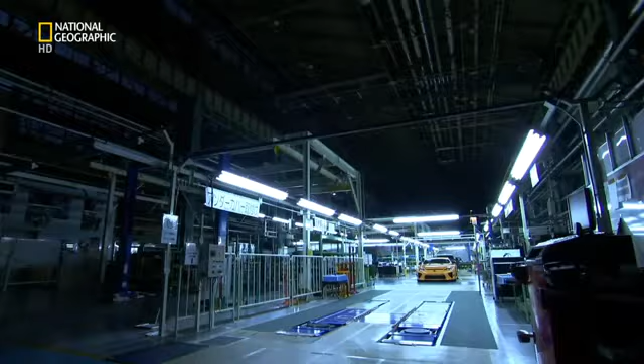Inside this top-secret mega-factory, a car like no other is taking shape. Craftsmen hand-build what they consider an automotive work of art. Money is no object. This machine must redefine a billion-dollar brand. Failure is not an option.

Japanese marque Lexus sells itself on luxury, marketing its cars as elegant, quiet, high-tech, and efficient. Now, a different kind of car wears the Lexus badge, the LFA. Aggressive, loud, agile. Highest revving V10 engine in a production car. 325 kilometers per hour. A car like nothing Lexus has ever produced before.

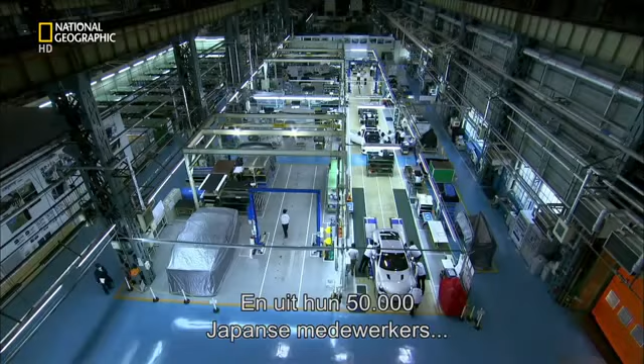The company transformed two unassuming blocks of this megafactory to create the LFA. They then scoured Toyota's 50,000 Japanese workforce to handpick just 175.

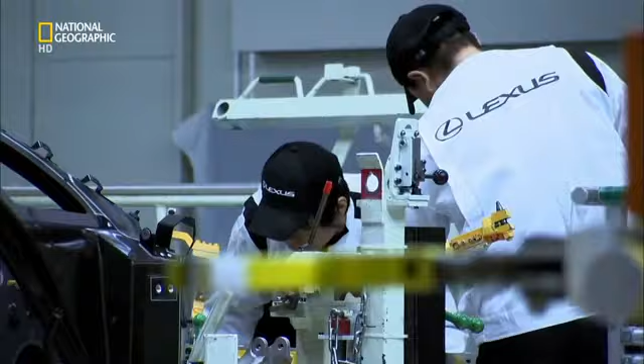All the associates here at the LFA Works feel they are artisans, not just operators. These artisans are known as takumi, Japanese for craftsmen, a status only conferred on the most highly trained, skilled workers. Each and every associate at the LFA Works is seeking to achieve perfection, taking this challenge on with a sort of samurai spirit.

Yamanaka Shigeru is manager of the LFA Works. His teamwork credentials come from another time-honored Japanese tradition: baseball. Before this, I was working as manager of the Toyota Motor Corporation baseball team, which brought people together from lots of different backgrounds. It was because I could manage that organization that I was made manager here.

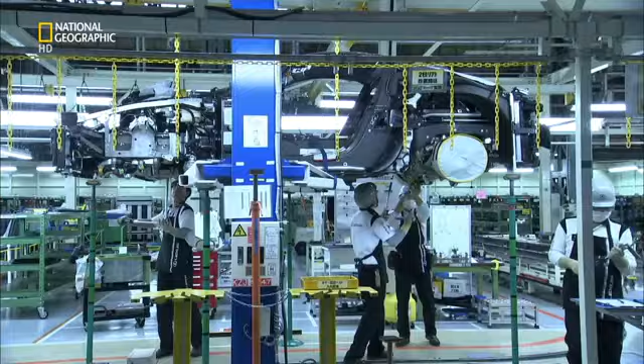To reach their goal, the tight-knit team utilize sophisticated tools and materials to build the car. The most important of these is carbon fiber composite. Carbon is crucial to the car's performance. It's a material five times the strength of steel, yet a quarter the weight. It's the construction material of choice for both Formula One racing cars and the aerospace industry.

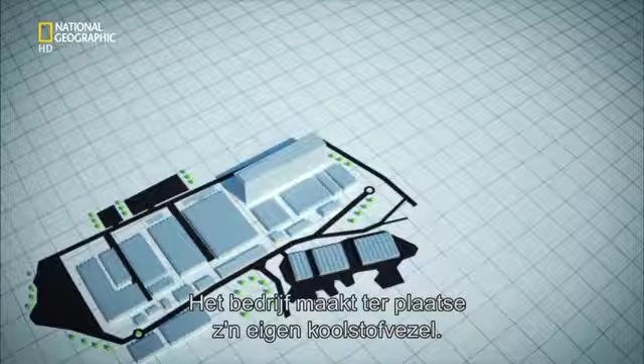The company even make their own carbon fiber here on site. Up until now, no television cameras have ever been allowed inside this top-secret facility. First, simple strands of carbon fiber are woven into a pliable cloth using an automated weaving machine.

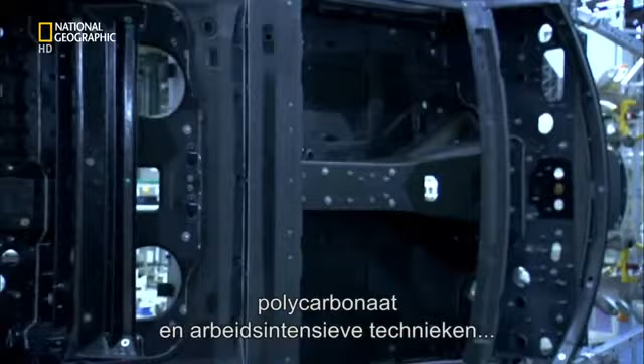This fabric is then transformed through heat, pressure, polycarbonate resin, and labor-intensive techniques into the car's core, known as the tub. The tub is pieced together like a 3D jigsaw. It starts with the construction of the floor. To make it, precisely cut carbon fiber cloth is lifted onto a mold.

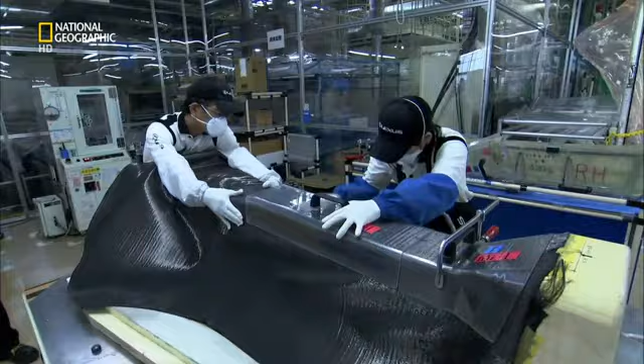Next, skilled takumi smooth the supple fabric over the mold. This one is for the transmission tunnel that will house the drive shaft and exhaust. In very complex areas like this, the fabric inevitably becomes frayed and not very neat. The associates work with these areas as if working with silk, taking great care every day. They also wear masks to avoid breathing in the hazardous fibers.

In the beginning, the associates found it very difficult to work this material. It was much easier when they used an iron.

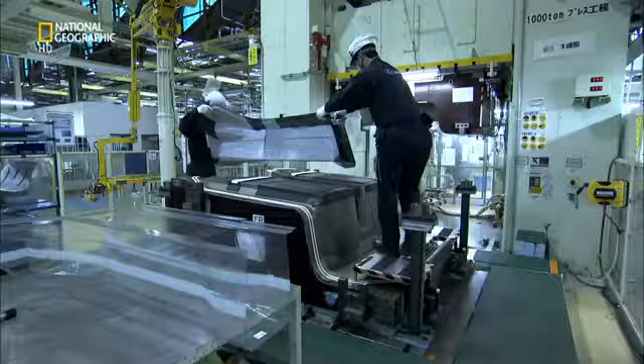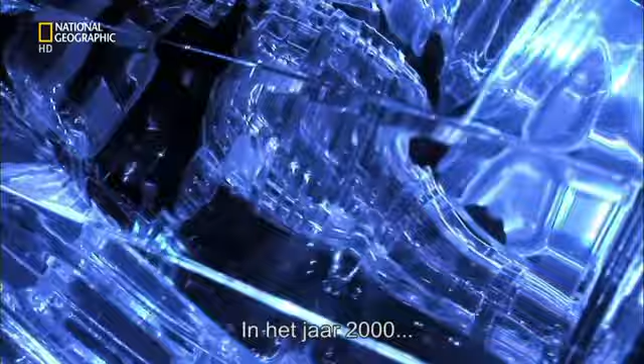Back in 2000, the concept of a world-beating supercar only exists in one man's head. At the company, I talked to just a small group of people at the top, not expecting anything, and they said, go ahead and try.

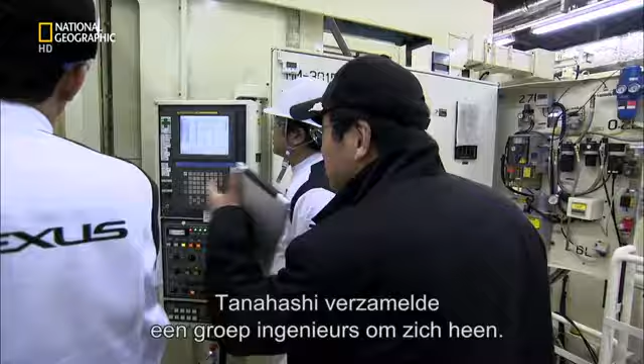With permission to proceed, Tanahashi gathers a team of engineers around him, and they start to make the basic engineering decisions. In the beginning, we planned to make the body from aluminium.

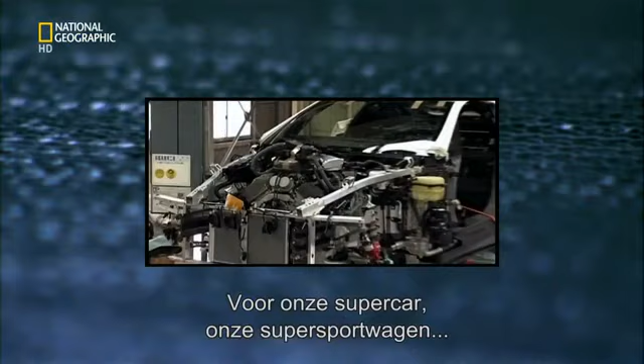But Tanahashi is fascinated with the possibilities offered by carbon. Developing a supercar, a super sports car, carbon fiber was a material I really wanted to try using, if at all possible.

But this wonder material has its drawbacks. It's expensive, and the company has never used it to build any of their cars before.

Despite these significant challenges, Tanahashi gets his way. In 2005, my boss said, why not go for carbon, slapping me on the shoulder. And I made the decision to go for carbon then.

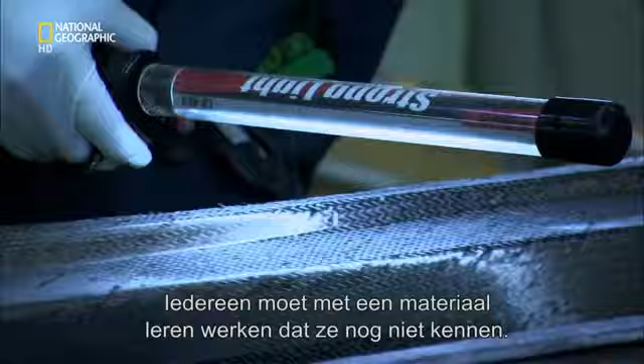It's a bold step. Everyone involved with this project must master a material they have no experience with at all. It was the first time the workers had touched carbon, and everything about it was difficult for the workers.

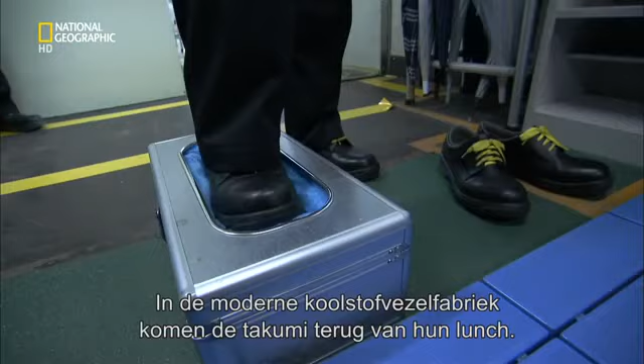In the state-of-the-art carbon fibre facility, the Takumi are returning from lunch. They vacuum themselves down to remove any foreign particles before entering a highly confidential sealed room.

Here, the majority of the tub's central frame is created using the most intricate techniques. In this process, an automated laser cuts out hundreds of individual shapes from carbon fibre cloth that's been pre-impregnated with a sticky resin.

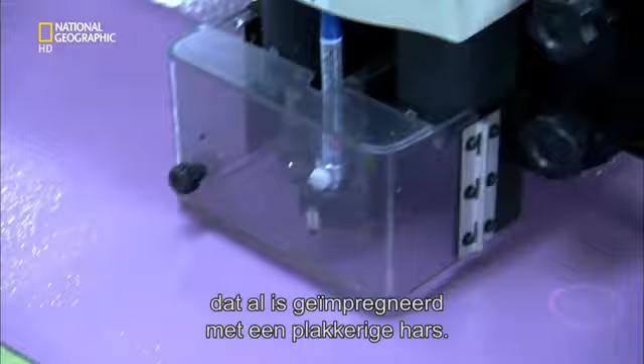Next, Takumi layer the cutouts, up to 20 sheets deep, onto a mould. This one will make the right side panel. The associate uses a dryer to raise the temperature of the laminate and half melts the resin as he applies it.

The tacky cutouts stick to each other and any gaps are squeezed out using a vacuum bag that forces them together.

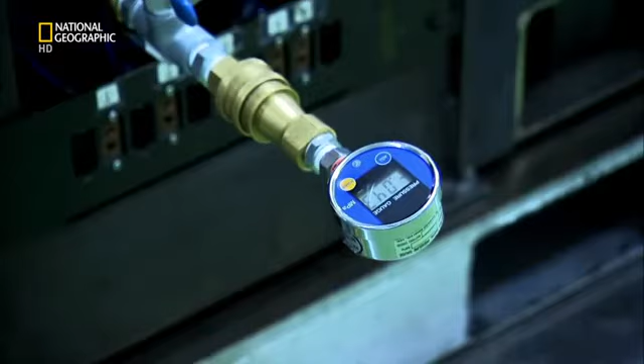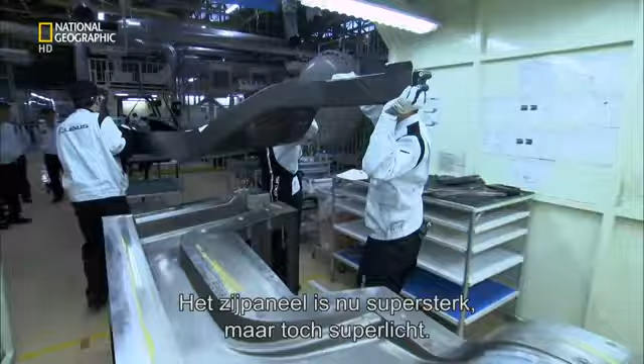The shrink-wrapped side panel is then wheeled across the works and loaded into a pressurized oven. Baking overnight at 150 degrees Celsius sets the resin, resulting in a side panel that's both ultra-strong and ultra-light. An aluminium equivalent would be twice as heavy.

Weight saving is the holy grail for all auto engineers. Less weight and more power leads to increased acceleration, and speed defines a supercar.

The body of the LFA is 65% carbon fibre, helping it accelerate from 0 to 100 kilometers per hour in 3.7 seconds. If made of aluminium, it will be 100 kilograms heavier, like having a sumo wrestler in the passenger seat. As it is, this car weighs just 1,400 kilograms all in.

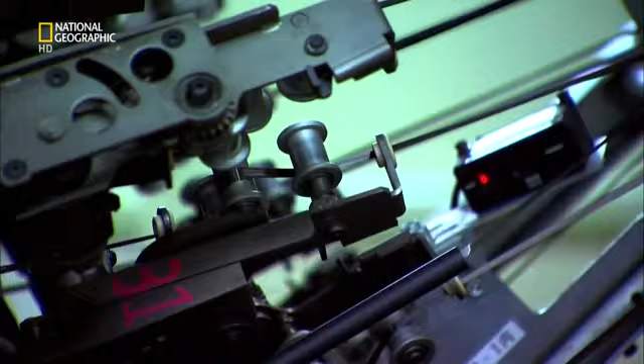Back at the factory, in a locked room, a bespoke machine creates two crucial parts to complete the tub's construction. The roof rails support the windscreen, as well as protecting the driver if the car rolls over.

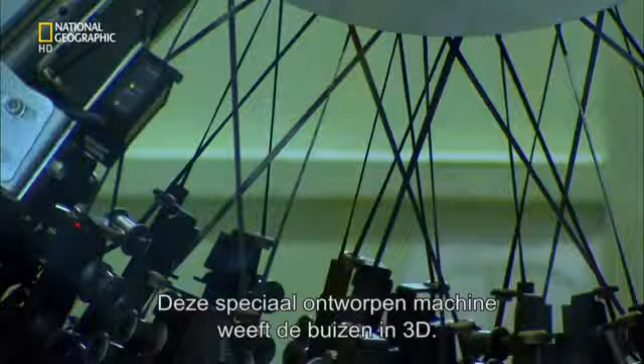This custom-built circular loom weaves the carbon rail in 3D. It uses lasers to control the feed of carbon fibre strands onto 144 bobbins.

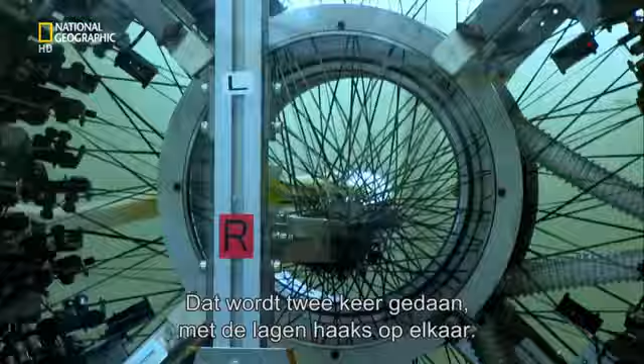These knit the carbon around a top-secret automated template that's fed through the centre of the loom. This is done twice over to cross-hatch the carbon weave, so giving the rail its strength.

The whole mechanism has its own control box, and for good reason. If something goes wrong, even a little thing, the shape gets distorted immediately, so the operator constantly pays attention to avoid this.

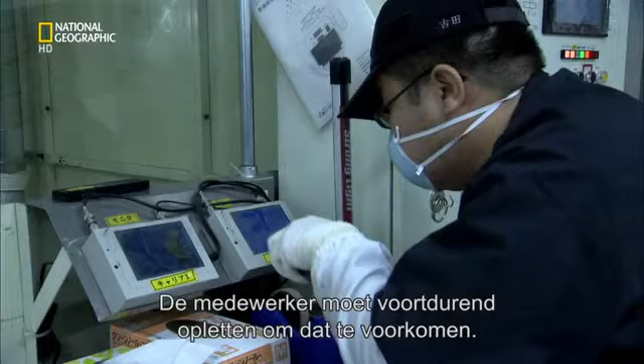The roof rail is heated and impregnated with more resin to complete its metamorphosis from a flexible tube to a rock-hard rail. You may think that this is quite heavy, but it is only 2 kilograms.

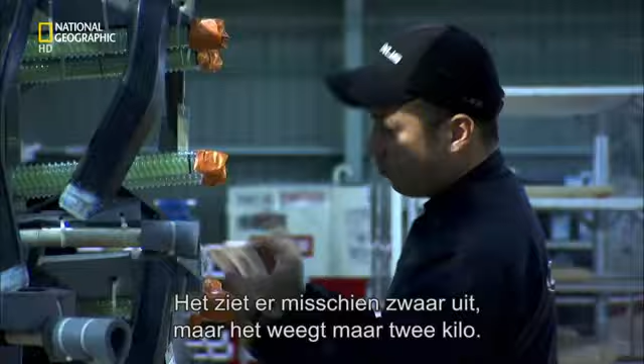The tub is bonded in another top-secret jig. First, a super-strong adhesive, known as epoxy resin, is applied by robot and hand to each of the parts. The separate parts are transferred to the jig and locked in place. Pop rivets keep the pieces aligned.

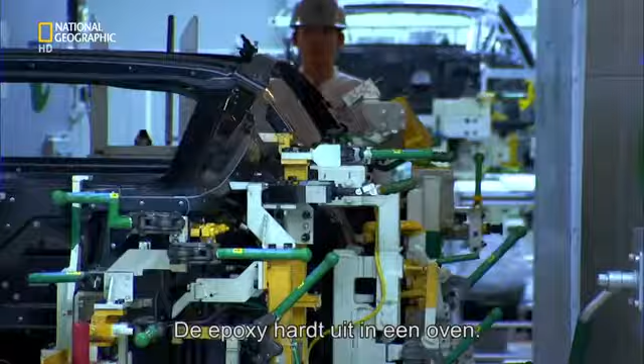To cure the epoxy, the jig is pushed into an oven and then baked for 60 minutes at 60 degrees Celsius. The resulting tub is so strong, it acts as both the structural core of the car and as a crush-resistant safety cell should the car crash.

The challenge now is for Matsumoto Kengo, chief designer of the LFA, to create a car with a body as technical as it is elegant. For us, aerodynamics, heat and airflow management should be tangible in the design.

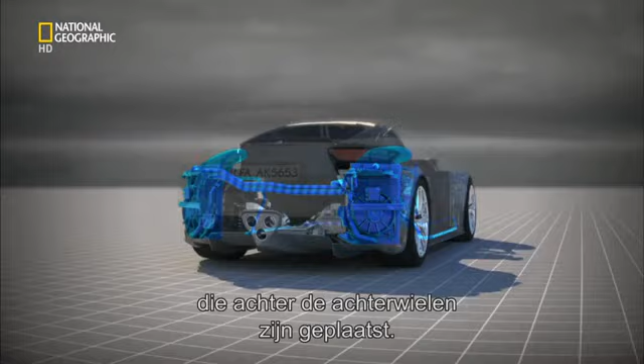A conventional car cools its engine with forward-mounted radiators that suck cold air through a front grille. Not the LFA. Front space is at a premium, so coolant is pumped from the hot engine to twin radiators mounted behind the car's rear wheels. Matsumoto had to shape the car to funnel cold air to these vital components.

Airflow management is optimally controlled by setting the angle between the door mirror and the cabin. It goes past the cabin and smoothly into the air intake for the rear radiator. This shape is not just for styling. The intake is deliberately formed here, from the base of the glass. The result is an airflow system capable of cooling the engine even under the most extreme race conditions.

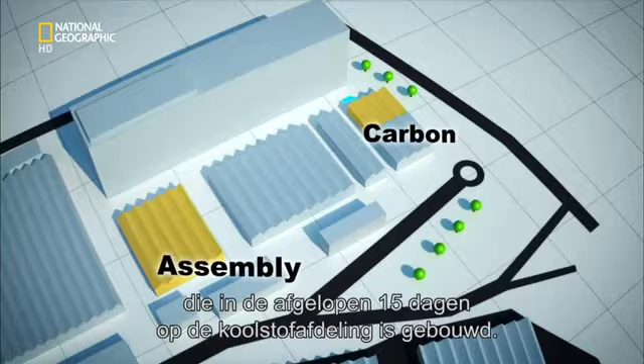It's 8:45 in the morning at the LFA works. The Takumi are warming up for an 8-hour shift ahead. Their first task is to greet the bare cabin as it arrives from its 15-day build in carbon round the corner.

In assembly, the cabin will progress through 4 positions: trim, chassis, final, and alignment. 15,000 parts go into making an LFA. The first of these are attached here in trim.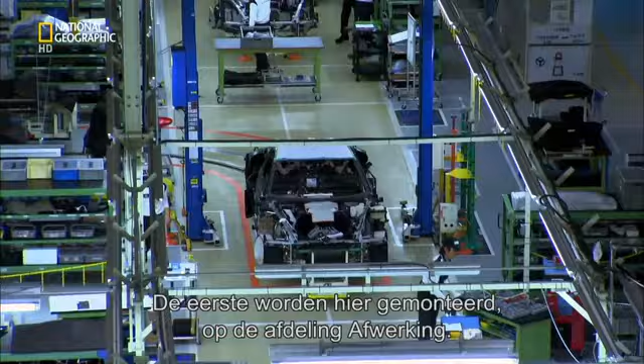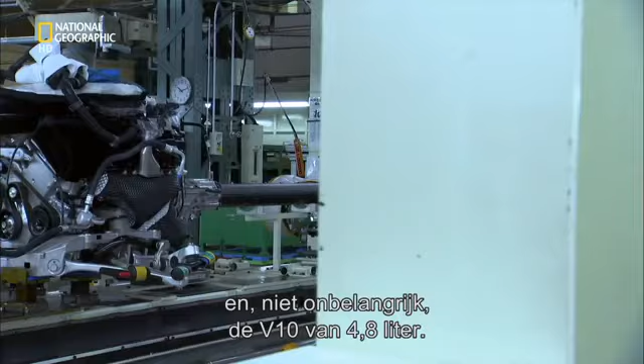Just meters away, other Takumi assemble the drivetrain and suspension. The drivetrain comprises the transmission, torque tube, and last but not least, a 4.8-litre V10.

The location of this engine is crucial to the car's entire concept. I wanted to build the car around the people in it. And for a supercar that puts people first, the optimum place for the engine is front mid. This location puts the engine between the driver and the car's front wheels. With the transmission placed at the rear, the driver is in the center and the car feels balanced to drive.

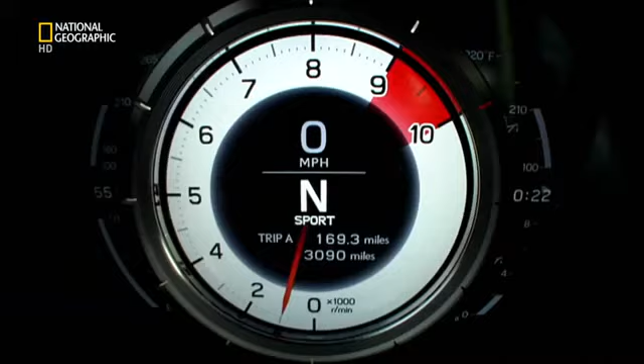The aim is to make the car's handling as good as possible. But a front mid configuration dramatically restricts the space available for the engine. Tanahashi has a problem. You need an engine of a certain size with a certain degree of compactness, but you want a high-powered engine as well. Tanahashi needs a small engine to fit in the restricted engine space, but he also needs the power of a large engine because power equals speed.

And that isn't all. The high-pitched sound of Formula One makes you shiver, doesn't it? I really wanted to have that as part of the LFA. Only a high-revving V10 engine supplies this combination of power and sound, but a traditional V10 is too big for his mid-front configuration. Lexus have made nothing like this before; their production line cars use 6- and 8-cylinder engines engineered for a super quiet ride. This V10 will be the opposite.

Tanahashi turns to some old friends for help. We are a motorcycle manufacturer. We understand power alone is not enough in a vehicle. For a sports car, small and lightweight is critical.

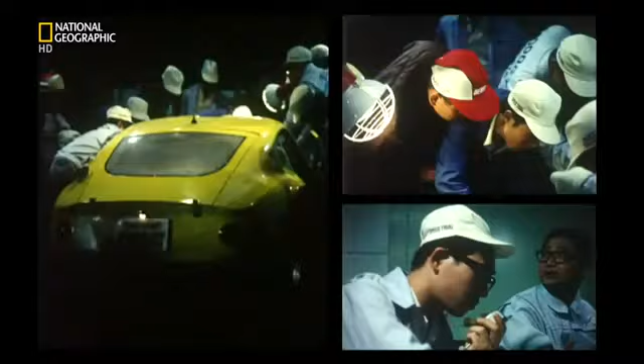For almost half a century, Yamaha have worked with Toyota to create high-powered, lightweight engines and cars. The legendary 2000 GT, star of the James Bond film You Only Live Twice, and Japan's first true sports car, was the first fruit of their collaboration.

Headed by Lexus engine guru Okamoto Takamitsu, the team sets itself an ambitious goal: to create a naturally aspirated V10 engine as compact as a traditional Lexus V8, with the weight of a V6. I wanted to create something different to any other supercar engine.

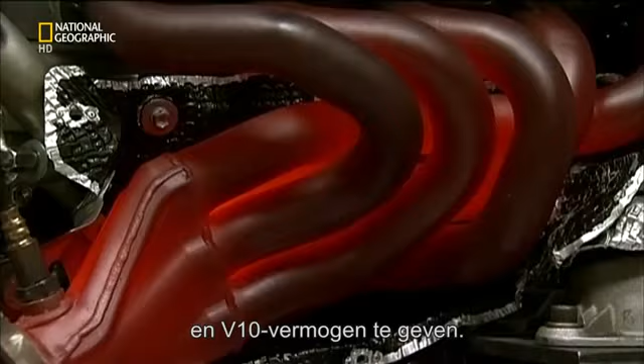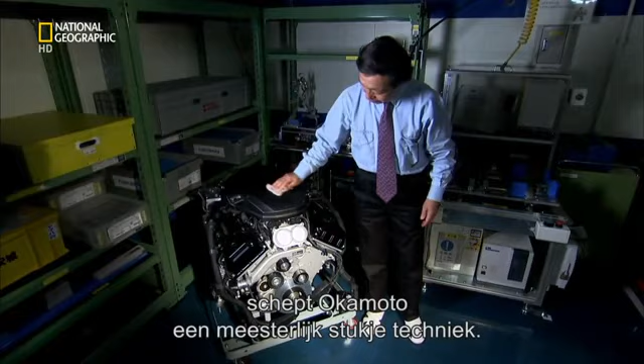Normally, engineers use turbochargers to boost the output of smaller engines to simulate V10 power. But turbocharged engines don't have the rapid response, acceleration or sound of a naturally aspirated V10. By using Yamaha's motorcycle know-how, the lightest metals and redesigning the engine's guts, Okamoto creates a masterpiece of engineering: a non-turbocharged compact V10 that fits into a mid-front design while keeping weight to a minimum.

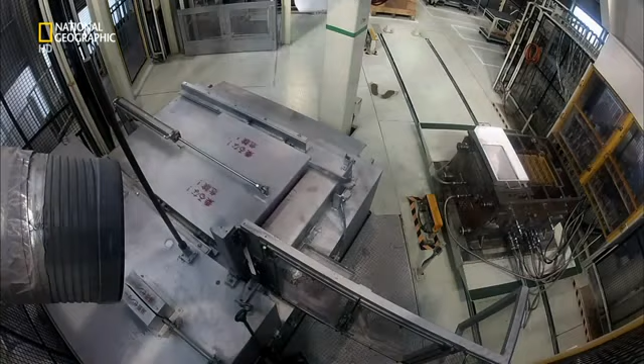The engine starts life in Toyota's Miyoshi plant as molten aluminium. It's cast in a 3D resin-impregnated sand mold made from 37 individual blocks that take a week to fashion. With the blocks fitted together, the mold is ready to be filled. At 750 degrees Celsius, impurities are scooped off the top of the molten aluminium.

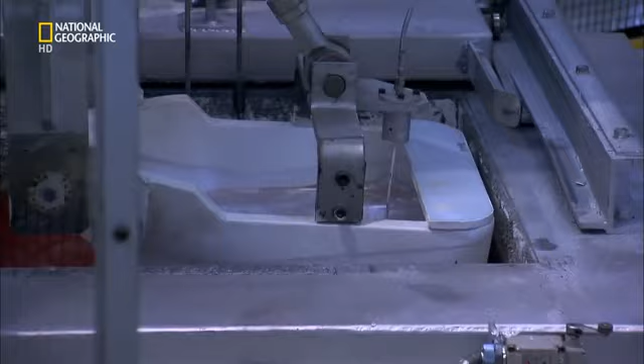The liquid metal flows into the mold as a vacuum sucks out any contaminating gases.

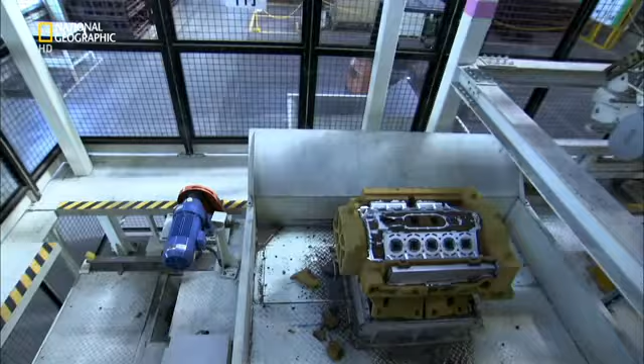Two hours later, with the metal set, the sand is hammered off to reveal the solid aluminium engine block inside.

It's off to Toyota City's Honsha factory and the company's highly confidential Formula One engine facility. These works are always off limits. We're going to go in. Are you ready? Come in. Television cameras have never been allowed in here before.

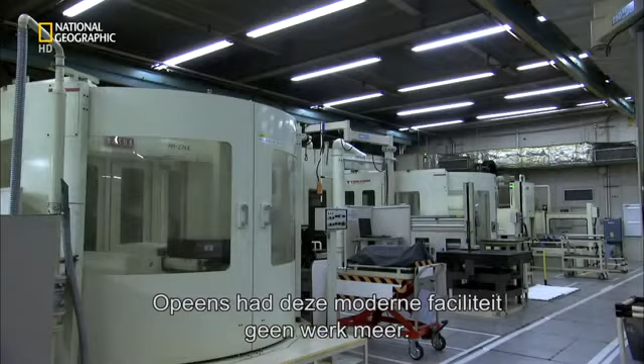For a decade, Toyota spent big competing in Formula One racing. But without a win in 139 races, they withdrew in 2009, leaving this state-of-the-art facility idle. For the LFA team, it was too good an opportunity to miss. The close parallels with F1 engine technology make this milling facility a ready-made fit.

In these million-dollar automated machining tools, the rough engine casts are milled, drilled and polished before emerging as precisely spec'd engine blocks.

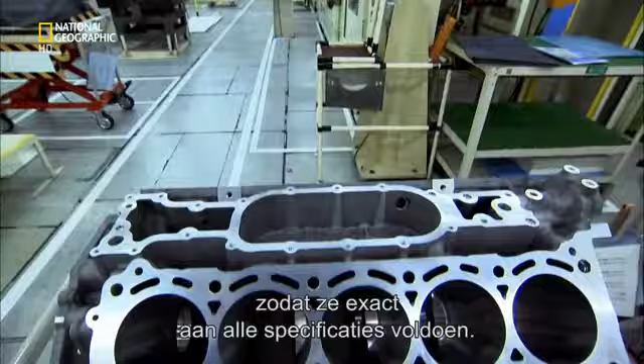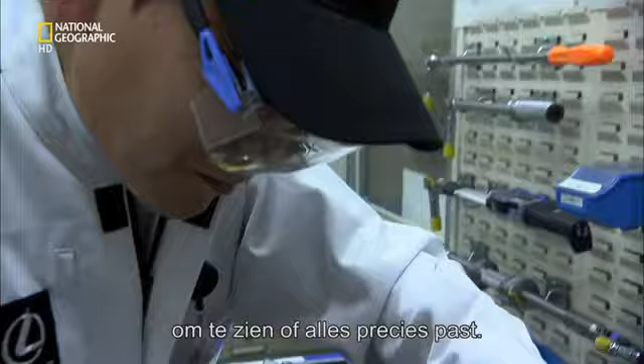Then the robots hand over to humans. In a sealed room, Takumi hone every sharp edge using precision polishing tools. Finally, a highly skilled Takumi pre-assembles the finished engine blocks to check they fit precisely. These blocks and screws are paired for life.

Disassembled, they travel as a unit to Yamaha's Iwata city plant, 90 kilometers southeast of Toyota City.

The engine room here takes obsession to new heights. As you'd expect, hairnets and airlocks prevent any particle contamination. But the room is also kept at a constant temperature and humidity to ensure that every engine part is at the same state of thermal expansion during assembly. This is more laboratory than workshop.

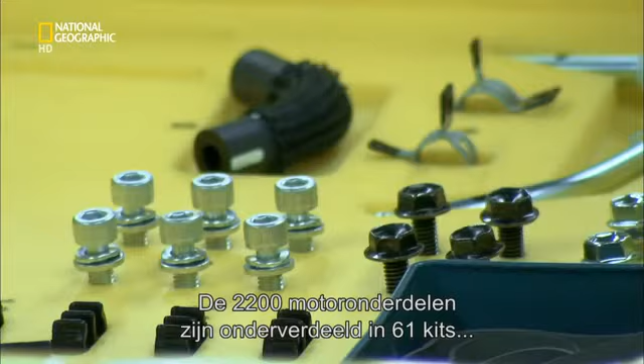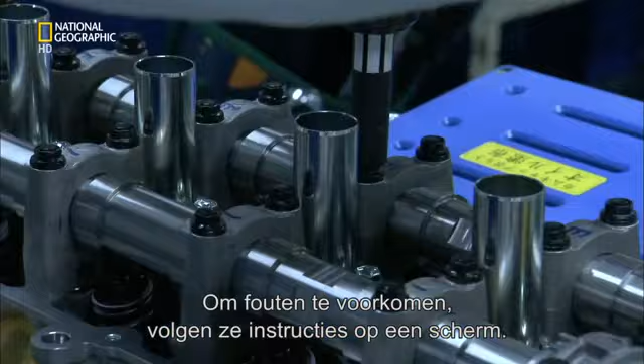The 2,200 engine parts are divided into 61 different kits for assembly by number. Four highly trained Takumi work here. Each is responsible for a single engine from start to finish. To avoid any mistakes, they follow a series of on-screen instructions. It takes 2.5 days to complete the build of one engine.

Each hand-assembled engine bears the Takumi signature.

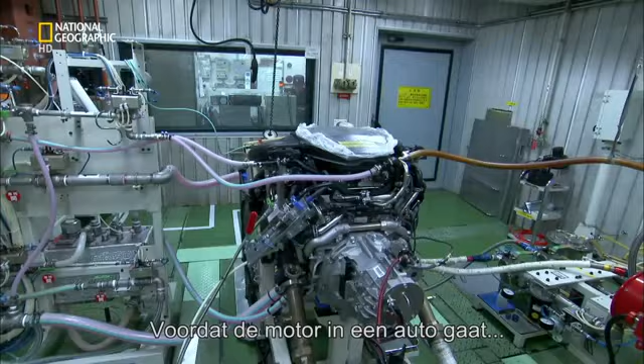Before this masterpiece goes anywhere near a car, it undergoes a half-day of exhaustive testing in the room next door to engine assembly. The resulting 4.8-litre engine is so responsive that it takes just half a second to reach 9,000 RPM.

That means instant acceleration, whatever gear you're in. This engine has excellent response and more RPM than any other commercially available engine. Response time is so fast that a digital rev counter is the only unit able to keep up.

And the sound of this high-revving engine is unmistakable. The sound of the LFA is unique and once heard, never forgotten.

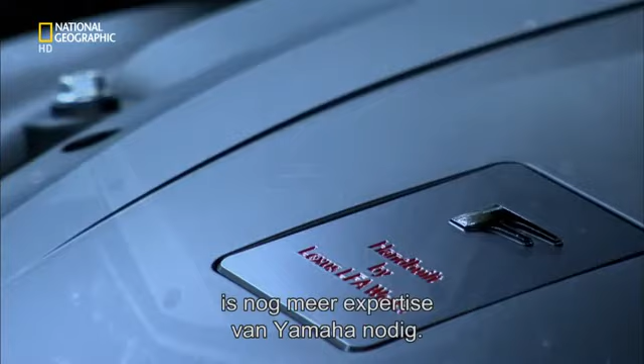To achieve the engine soundtrack that Tanahashi insists upon requires more of Yamaha's specialist knowledge. We are a manufacturer of musical instruments, so when it comes to sound technology, we have a certain level of know-how.

Honji Yoshikazu is obsessed with sound. I think the relationship between a super sports car and its driver is like the relationship between a top musical performer and their instrument. When they play in a certain way, they can listen to that sound and use it to produce another, better sound.

Critically, a car has two different sound characteristics. One sound is the exhaust. You can call it an iconic sound. Just by hearing that sound, you know which car it is. The other, which we were particularly concerned with, is the sound heard by the driver.

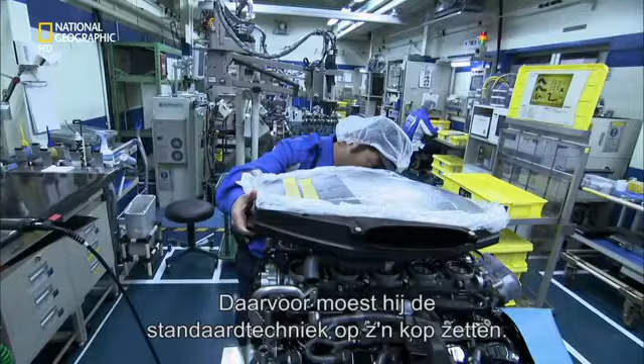To refine the driver's soundtrack, Heiji Maruyama, general manager of Yamaha Motors, had to redesign the component that sits on top of the engine, called the surge tank, by turning convention on its head. The function of the surge tank is to send air equally into all 10 cylinders.

Normally, techniques to reduce noise from the intakes are used. We thought to go the other way and use it to amplify the sound, to communicate it to the driver. Maruyama tunes the chamber by varying the thickness of the surge tank's upper surface and adding internal vibrating ribs.

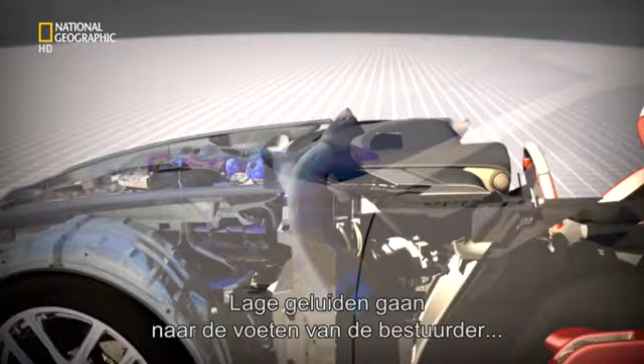The construction is very like that of an acoustic guitar or violin. The team channeled these good vibrations back into the cabin using sound passages. We use these to send low-pitch sound to the driver's feet and higher frequency sounds through at ear level. The driver is in the middle of this dynamic surround sound system.

The completed engine is forklifted onto a waiting truck for shipment back to the LFA works.

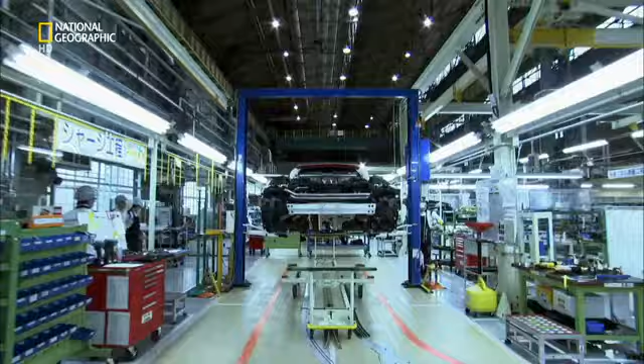Here, as part of the assembled drivetrain, it's inserted into the cabin's belly, guided only by eye.

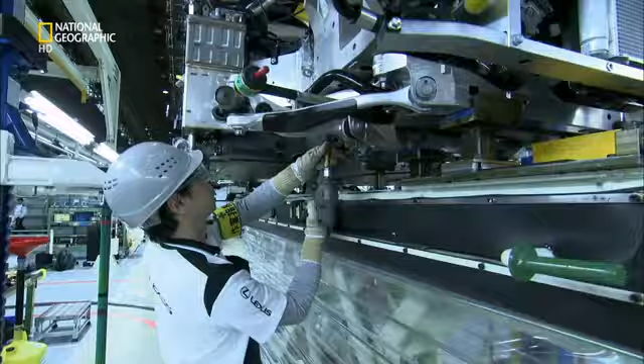With the guts of the car in place, it's time to feed them. An automated pump injects engine oil, brake fluid and coolant into the appropriate underbonnet opening.

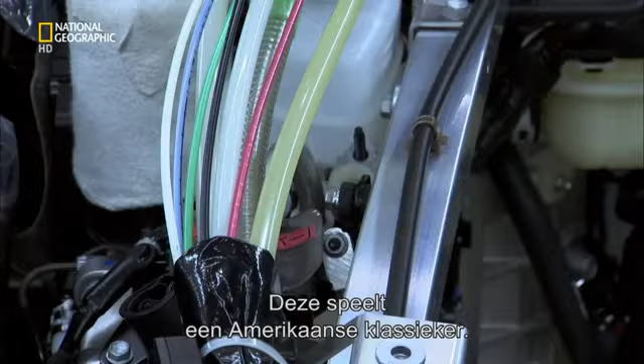In Japan, machines play a tune to alert anybody nearby that they're running. This one plays an American folk song. With the precise volume of fluid added, the pump stops, as does the music.

The car's 9 moulded glass fibre body panels are manufactured off-site. This material is both strong and light, but far cheaper to replace than carbon fibre, should the car crash.

The paint shop is under the same roof as assembly, but it's a very different world in here. At the LFA works, paint is one of the few production processes performed by robot. The company believes they give a more consistent finish.

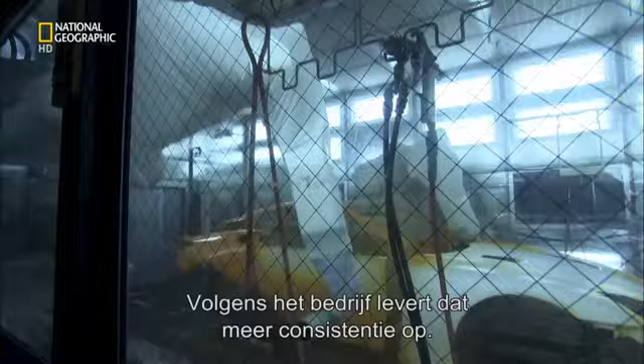But there's always an ongoing human battle in the paint department. Dust is the greatest enemy for painting. If dust gets into the paint surface, when it's heated, the dust swells up and causes a blister. So the atmosphere is controlled on a daily basis, and there's a strict dress code.

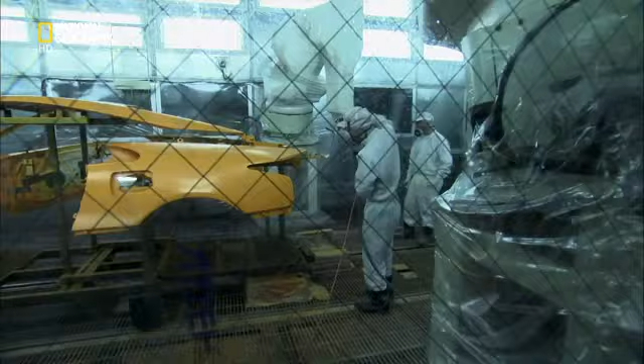Up to 5 layers of paint are applied, and where robots can't reach, humans can. Job done. The sprayed panels are dried in an oven at 100 degrees Celsius for 50 minutes before being wheeled out for inspection.

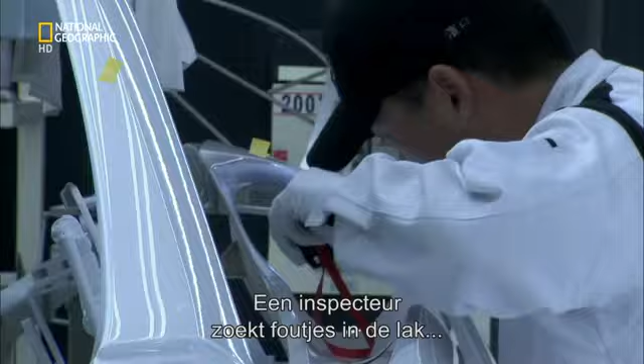The battle against dust continues, with water nozzles spraying a fine mist into the air to stop anything drifting onto the pristine surfaces. A bright light inspector spots any blemishes and marks them up to be polished out.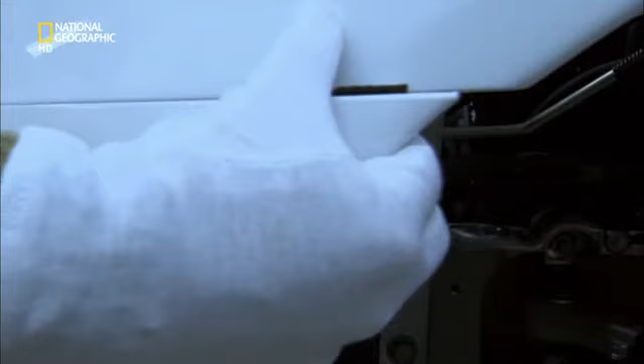The completed panels are wheeled out of paint across the factory floor and attached to the carbon tub back in assembly at the 3rd position on the line, known as final. Here, the hand-stitched leather interior is installed, and the forged aluminium wheels with bespoke Bridgestone tyres are also fitted.

It looks as if the associates are performing each task very slowly, but every one of them is working very carefully and with a high degree of certainty. If you compare it to a sport, they are top players who complete a successful play every time.

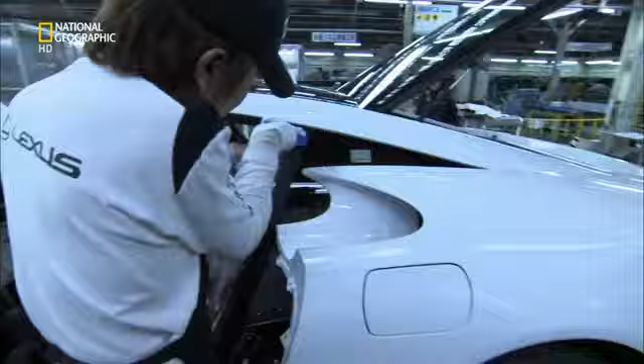The LFA works runs like clockwork, yet there's no clock watching. The reason why there is so much time is that Chief Yamanaka tells us to take our time and work slowly so that we can make something that we know is good. How can I put it?

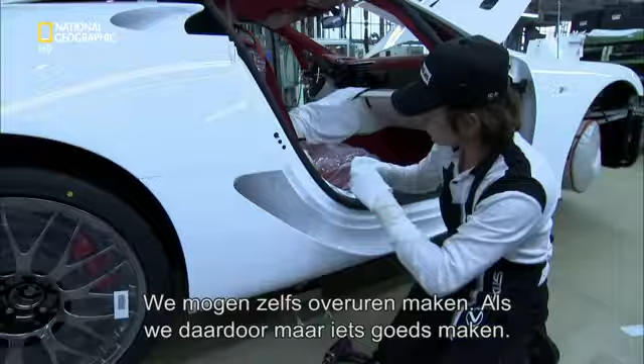He says that in order to ensure quality, we can take as much time as we need. That goes for overtime as well. If it means we make something good, then we can do overtime. The only stipulation is that one car must drive off this assembly line every day.

And from the beginning, Chief Engineer Tanahashi was clear that only 500 would be built. At a car a day, that will take just 2 years. And then, this factory will close.

Making only 500 cars positions the LFA as a very special car. There is no plan to make any more at all.

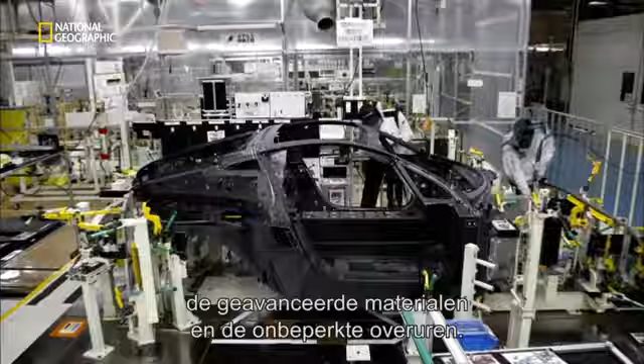Even pricing the LFA at $375,000, the most expensive Japanese road car ever, a limited production run isn't going to recoup the costs of development, the use of cutting-edge materials, and unlimited overtime.

I think it will be difficult to make a profit with only 500 units delivered. But by producing the LFA, the Lexus brand gains in value and is well received worldwide.

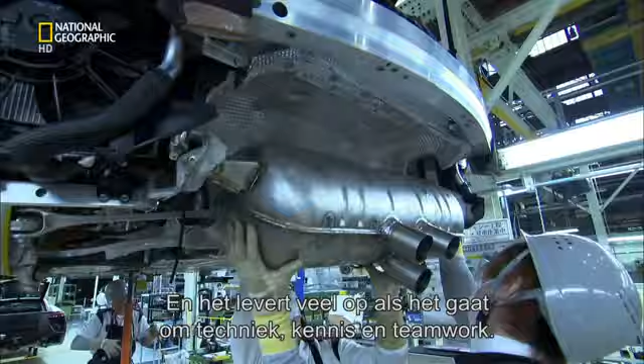I think the legacy will be left in technique, knowledge and teamwork for making cars that will please our customers in the future.

Back in 2004, with the prototype build, Chief Engineer Tanahashi takes a bold decision. He wants the car proved on the severest of tracks. Nothing in Japan fits the bill. So he takes the entire development team to the notorious Nürburgring in Germany.

For us car makers, the Nordschleife on the Nürburgring is like a mecca for cars. This is where this car was honed.

The 20-kilometer Nordschleife section of the Nürburgring is infamous as the world's most punishing test track. For 4 years, the team tests every aspect of the car's engineering around the Nordschleife's dips, jumps, relentless corners, and flat-out straights.

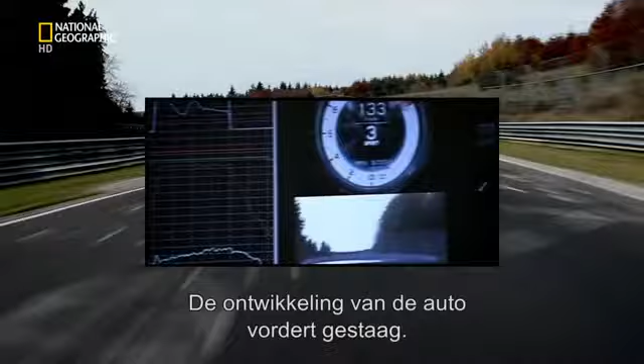The car's development makes progress towards its production deadline, but Tanahashi wants to fast-track its fine-tuning. In 2008, he throws it into the unforgiving world of racing and enters the Nürburgring 24-hour race. It was purely to get more feedback on the production type LFA and to improve it under real race conditions.

The brutal experiment works. A year later, the revised car wins its class. Tanahashi is finally happy, and in 2010, the LFA goes into full production.

And when in 2011, a special race edition of the standard LFA is launched, its name pays homage to the racetrack that forged it. It is with thanks to that sacred place that we called it the Nürburgring package.

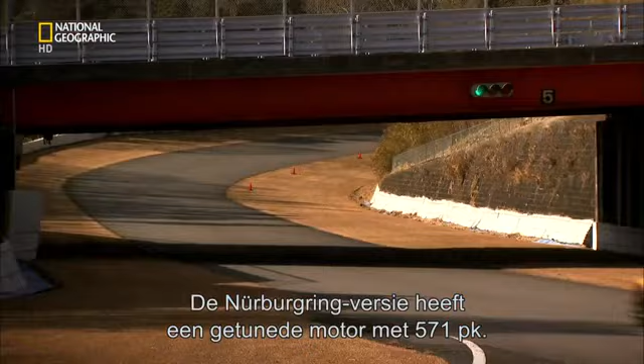This Nürburgring package has a retuned engine which pumps out 571 horsepower, 11 more than the standard engine. This extra power requires more downforce to keep the car on the track, so the rear spoiler is larger and fixed. Left and right canard fins on the car's front bumper also increase downforce. The stiffer lower suspension makes it more suitable for a life on the track. Finally, to increase acceleration, the computerized transmission is upgraded to change a split second faster.

It all adds up to a Japanese supercar. Only 50 will be built, each with a price tag $70,000 more than a standard LFA.

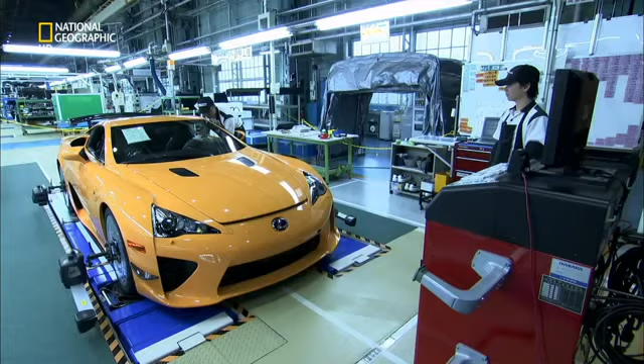Back at the LFA works, in assembly's last position, the wheels are aligned to ensure the car handles perfectly. After 3 days in assembly, the car officially moves to inspection.

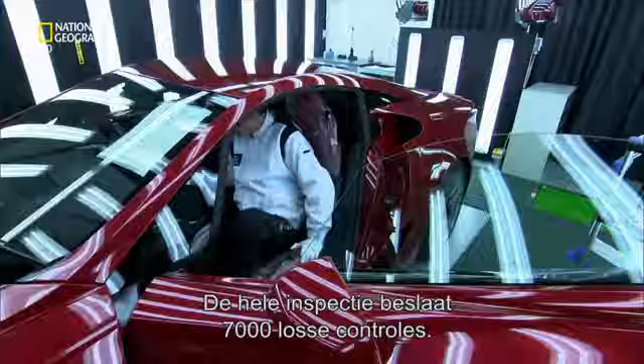The inspection process involves 7,000 separate checks. Hayashi Katsumi does the first of 1,482 of these under lights. Right now, I'm inspecting the paint surface, using my hands to feel for any uneven areas in the bodywork.

You have to touch it gently, like I'd touch a woman. I've been doing this job for 30 years. If I didn't have my wife, then it would certainly be my lover.

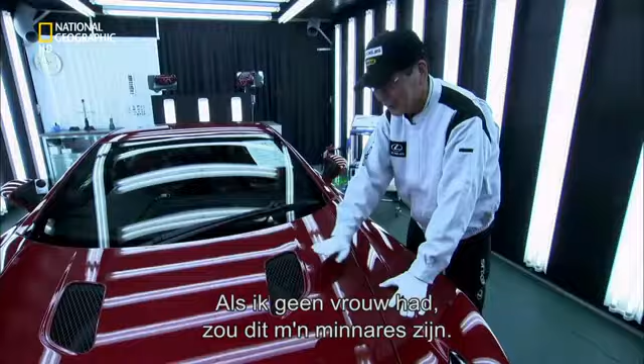With the internal and external surface inspection signed off, the car leaves the LFA works for good. It's driven through the Motomachi plant into quality control. This will be its home for the next 7 days.

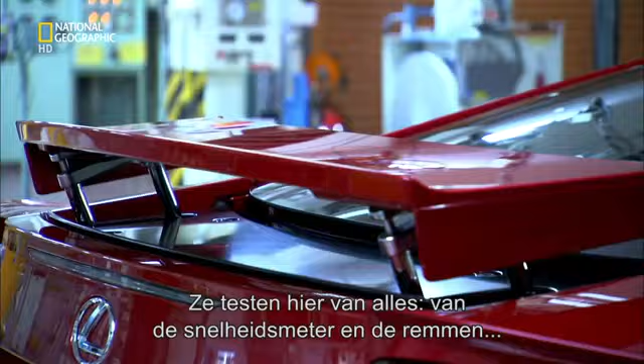The checks performed here range from speedometer and brake tests to water tightness. The reports fill a 350-page booklet.

Finally, test driver Amano Nobuaki ensures each of these cars is road ready when it leaves the factory. The car is bedded in on Motomachi's very own test track. The matte sections of the bodywork are to protect vulnerable areas from stone chips. I think this is the best possible job in the world.

Amano checks the car's controllability, engine sound, power, braking performance and vibration noise on the 1 kilometer track. There is one danger driving this car every day. Every now and again, I just want to forget the job and drive this car away somewhere to have for myself.

This car is complete and ready for its owner. To date, all 500 LFAs are spoken for. No more will be sold. The Lexus brand is safe, but Tanahashi still has something more to prove.

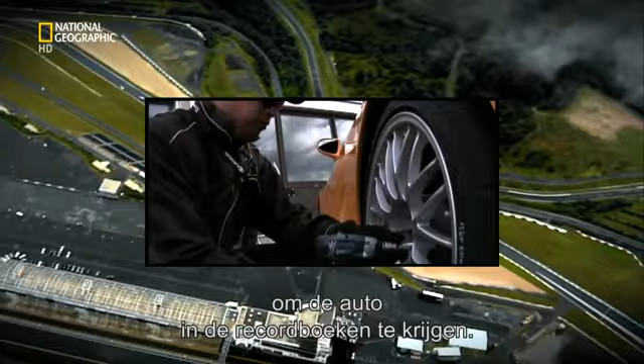In 2011, the team reassemble at the Nürburgring to put the car into the record books. They're out to beat the fastest official time by a road-registered production vehicle. This is the chance for the Nürburgring package to prove its pedigree.

With test driver Ida Akira behind the wheel, the team held their breath. I push the car on every corner. There are over 150 corners, driving very aggressively, but at the same time, I enjoyed it.

To beat the record, Ida must average 167 kilometers per hour over the track's 20 kilometers. I had no concept of the time when I crossed the finish line.

Seven minutes, 14 seconds. The fastest official time by a production car not using slick race tyres, and the 5th fastest time ever. It was an unbelievable moment. It's one of the best moments of my life.